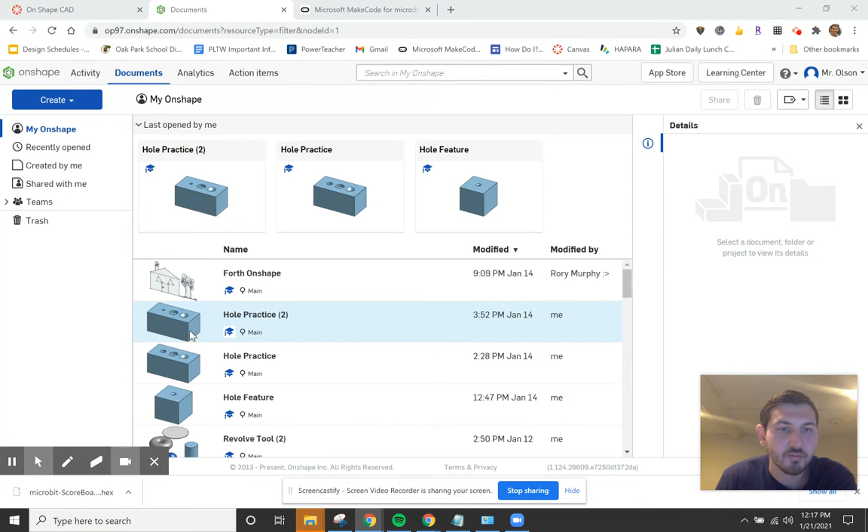This video is going to show you how to create a working drawing using the OnShape CAD program. Just to demonstrate it, I'm going to open up a basic object for you. That way you're able to just see how to import the object, add dimensions, and then also shade in some stuff. So I'm going to open up our hole practice, the one I went over when we were creating holes. And so I'm going to open that up.

Okay, so here's the object. You can choose any object that you're going to end up making. So whatever it is that you choose to do, just make sure that you are choosing the one that you want to make a drawing of. Got hide tools here. Okay, so when I'm done and I'm ready to make my drawing, my working drawing.

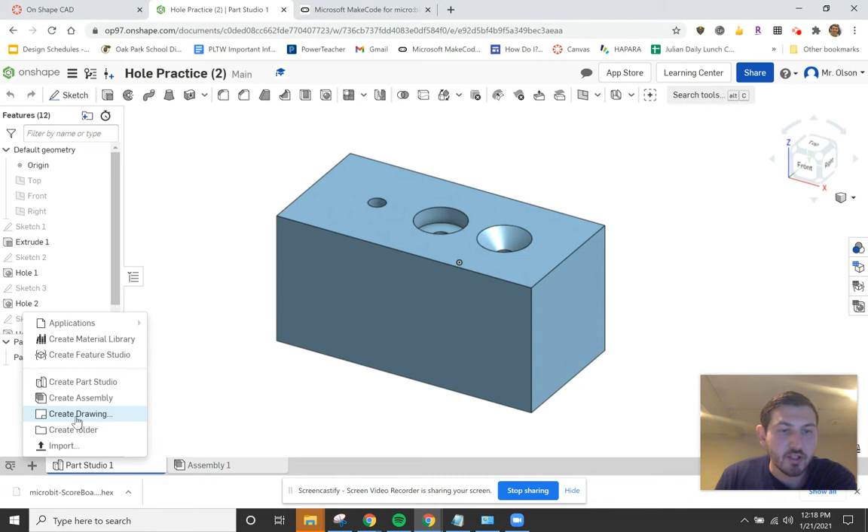Down here at the bottom, it says Insert New Element. So I'm going to click on Insert New Element. And then I'm going to create a drawing, and that's located right here. Once you are in here, I'm not sure you're going to have any recently opened ones. So if you go to OnShape, I'm just going to use the first one.

This is in inches. Okay, so if you are doing the bracket or something that is done in millimeters, you're going to want to choose the other template because then it's going to give you millimeters instead of inches. But since I used inches to create this one, I'm going to go ahead and use the drawing that uses inches as well. So I'll go ahead and hit OK.

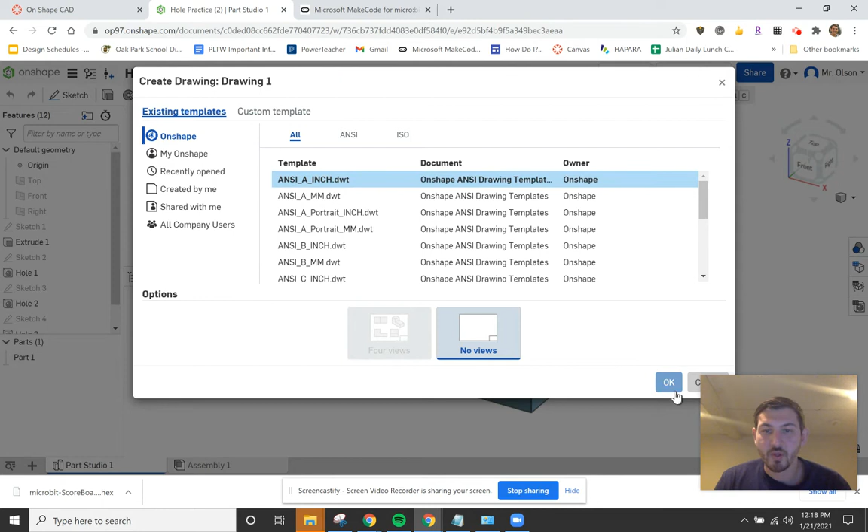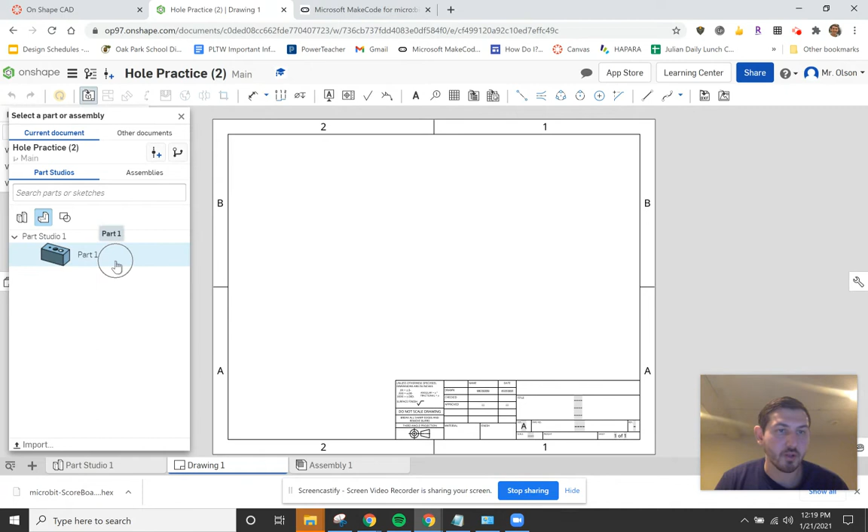All right, so because I had my part open, you can see that my part is ready to be imported right here. If you have multiple parts in one file, you should be able to see the parts in here as well, which is great because then you can just put them all in the same drawing if you have to. But because we're dealing with one part, I only have one part here.

So I'm going to click on my one part, part one, and I'm going to go ahead and insert my front view. The front view usually goes in the bottom left corner here. So I'm going to click. Okay, so that's my front view. If I move my mouse over to the right, this is going to be my side view. So I'll click again. Now I have my front and my side view.

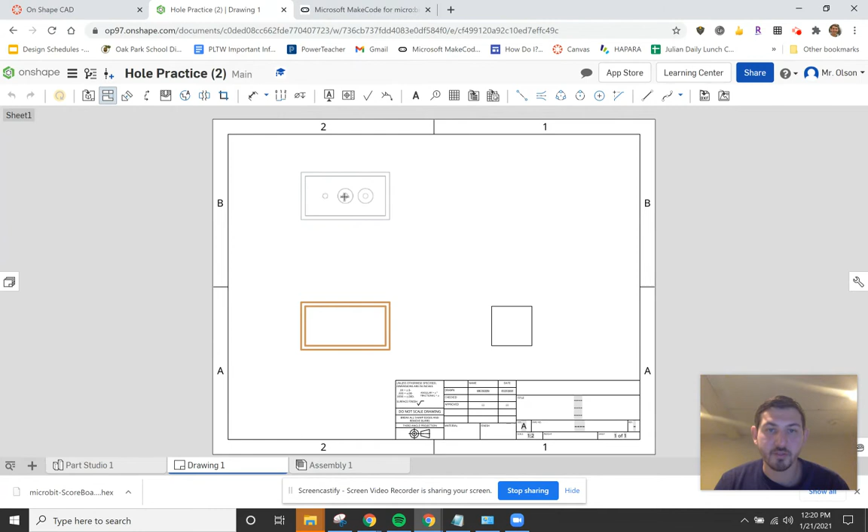Now I have to click here to select that object again. And now when I move my mouse up, I can do my top view. Now notice I'm starting to get some details because that's the first view. I'm going to click where I actually have some information. Okay, I'm going to click on my front view again.

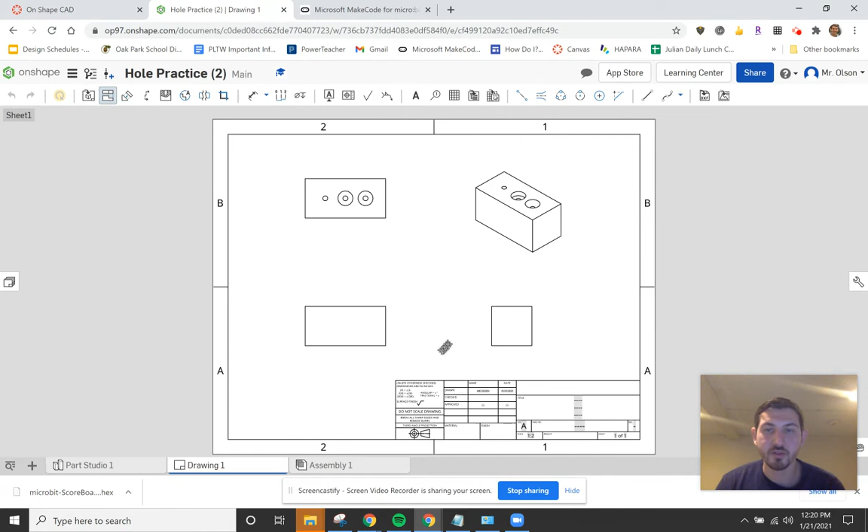And then I'm going to drag over to this corner piece, and this is where I'm going to place my isometric view. Remember, isometric means equal sides for my 3D view. I'm going to click, and that's going to place my object. So now I have all my views, which is great. Now I'm going to hit the escape button because I don't want to be placing any more views.

What I do want to see are some hidden views. So if I right-click this, I can view properties. And so from here, I have a bunch of different options. So view orientation, this is my front view. Okay, that's what I want.

If this is too small or too big, I can change that. So notice if I go like 1:1, my scale goes up. So that's like the actual size, 1:1. 1:2 gets smaller. If you want it bigger, you go the other way, so it's like 2:1, 3:1, and you can get it a lot bigger. So depending on how big your object is, you're going to want to change the size of that accordingly.

Tangent edges, we're going to do solid. So we're not going to be changing that. Best performance is fine. And front label. Okay, so that's all there.

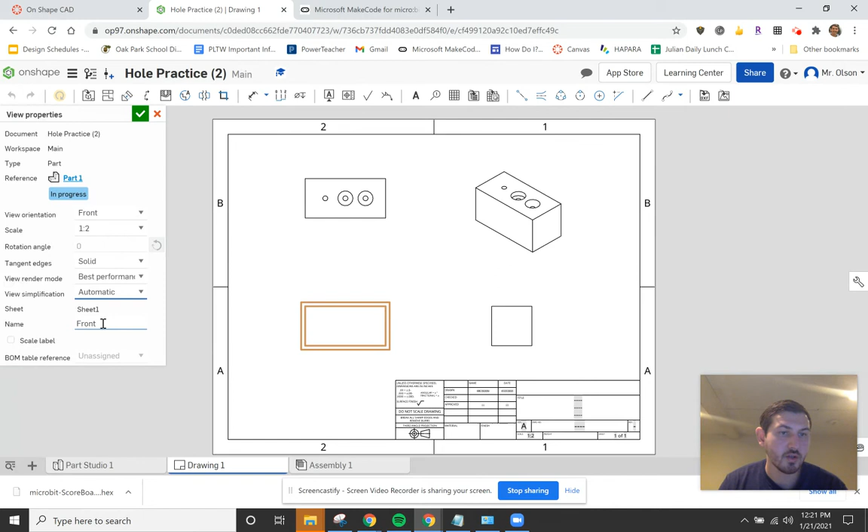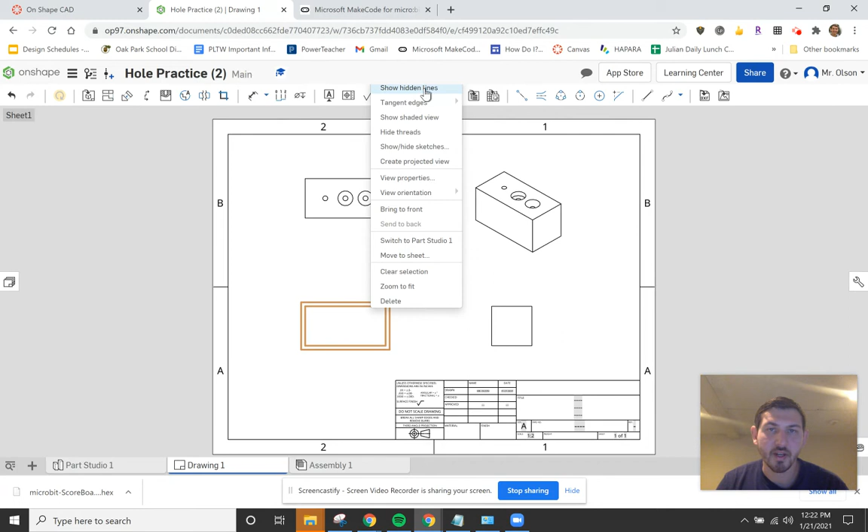Now to show my hidden lines, I right-clicked on my object, and I'm going to go ahead and click on hidden lines. Notice that now it shows my holes. I can also do that here. In this case, it's not going to make any sense because you're going to be overlapping. So I think it's almost better just to leave the hidden lines on this one. I could right-click and show hidden lines again on this as well.

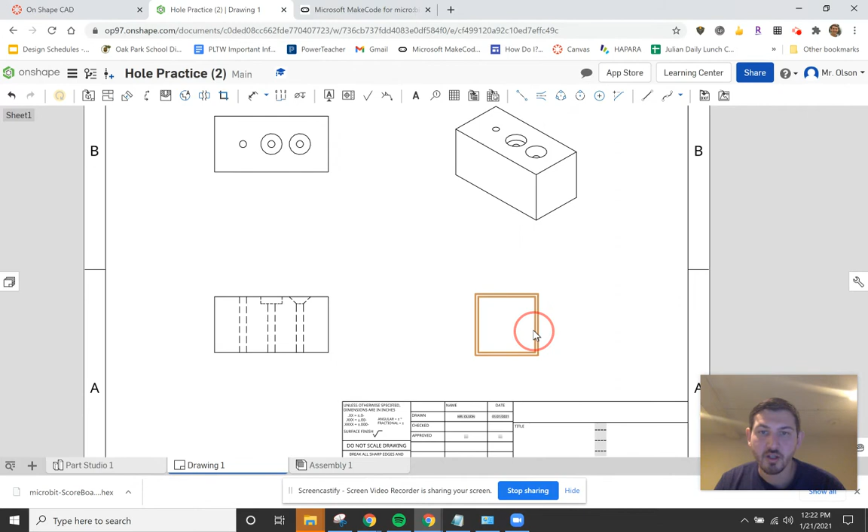I'm not going to do that. I don't know why it's going off my screen like that, that's kind of weird. Let me zoom out.

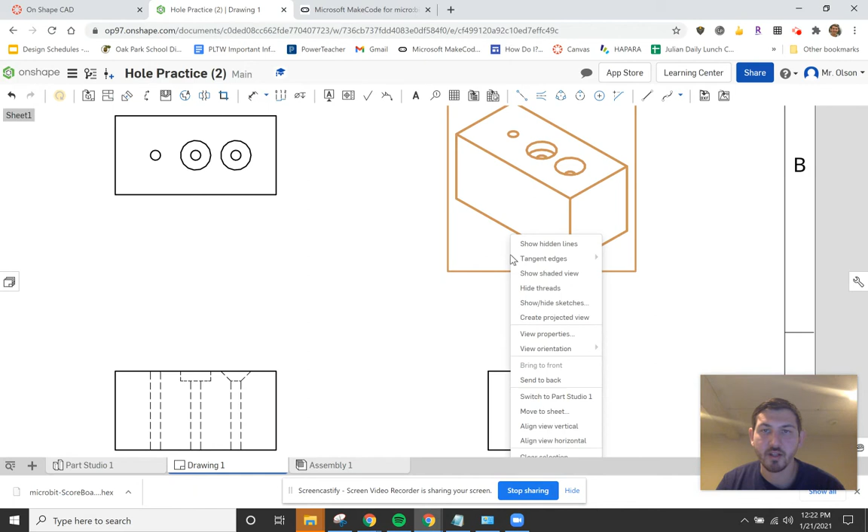So there's my hidden lines. This 3D view I want shaded, so if I right click on that, I can do show shaded view. That's what I want, shade it in because that's the most realistic view.

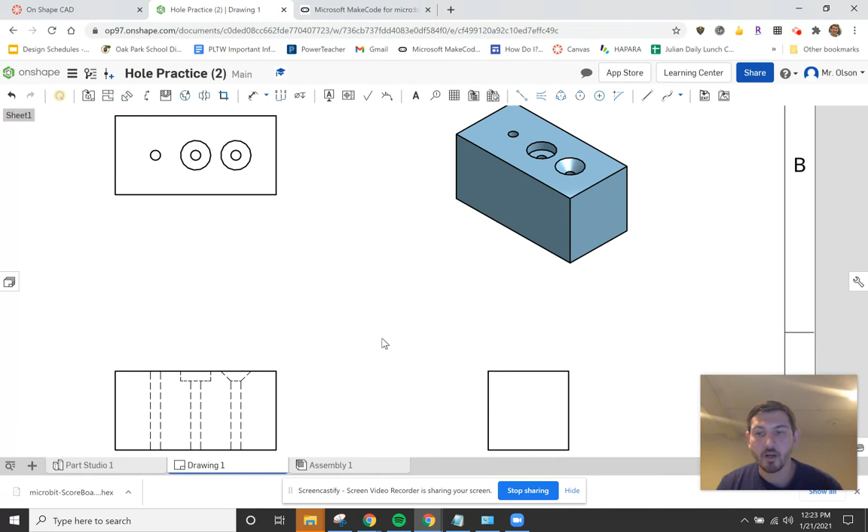And now I'm ready to put in my annotations. So my dimensions are right here. The thing you want to remember with dimensions is, first of all, you don't ever dimension the 3D view. Secondly, you want to dimension enough where someone could make this object if they got this blueprint or working drawing, but you don't want to over-dimension where you're relabeling things.

So what do I mean by that? Let's just start dimensioning. If I click here and say this line is this height, I wouldn't want to go and say this height is 2 also, because I already know that from this dimension right here. This is the height, this is the height.

Just like if I were to do the width here, let's go ahead and click, and I'm going to do the length of 4. This is also 4, the length is also up here, right? But I don't need to relabel that because I already have it down here. These lines all match up with each other.

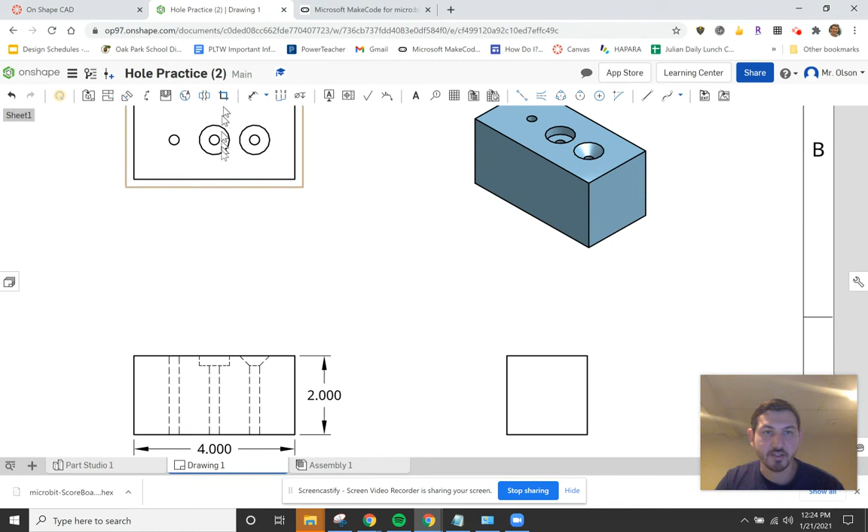So this line matches up with this line, these lines match up with the lines in the... Now the width, I don't have on this view, so I would have to click my dimension and label my width over here.

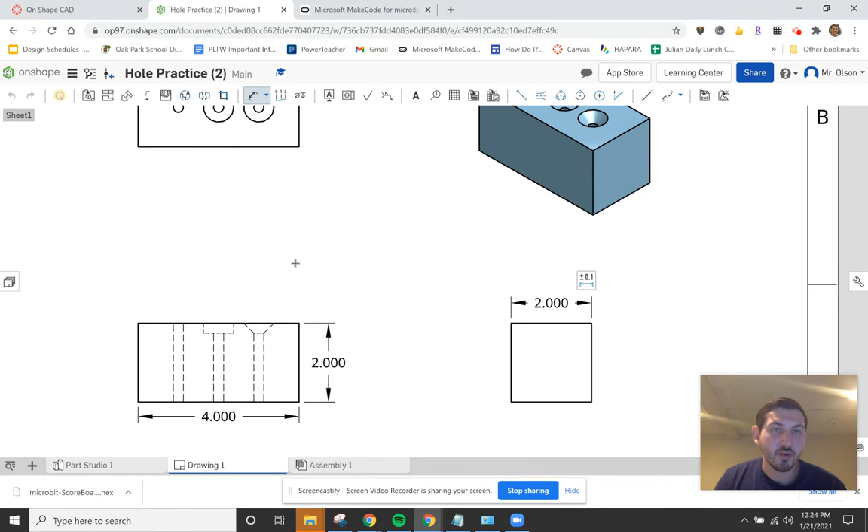You can then get specific with the holes. So you can say the depth right here is the diameter of my hole. This outer one is the diameter of the countersink part, so the outer one here, and that's the same thing over here. Here's my hole, here is my counterbore. And then if I click on this one, that's my hole.

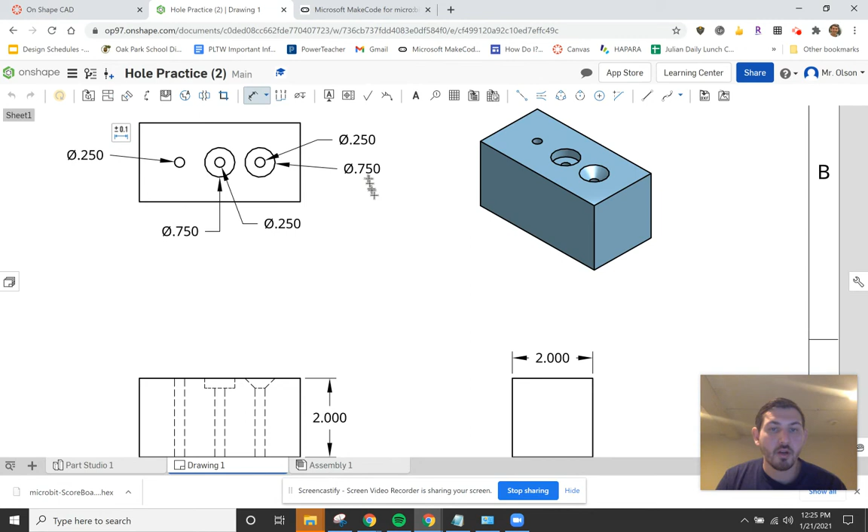Now they happen to be the same, but it is important that you mark those as well. With all that information, minus the fact that the countersink you have to have the angle at which it's at, you have all the information that you need in order to make this block, which is pretty neat just by those dimensions that I've included. So that is actually correctly done.

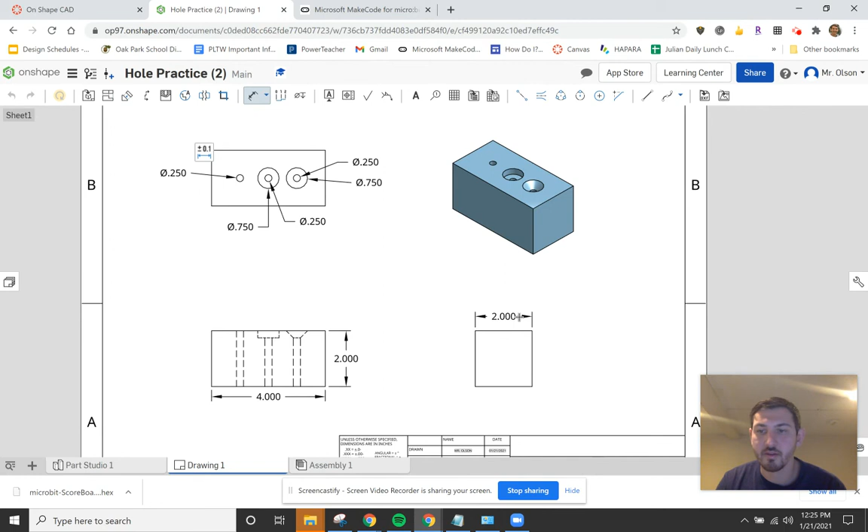Now, could I have dimensioned down here? Sure, you could have, but I just figured maybe all the holes are up here, it's easier to see. I have my height, length, and width on the bottom part. It just makes it kind of easier to follow along.

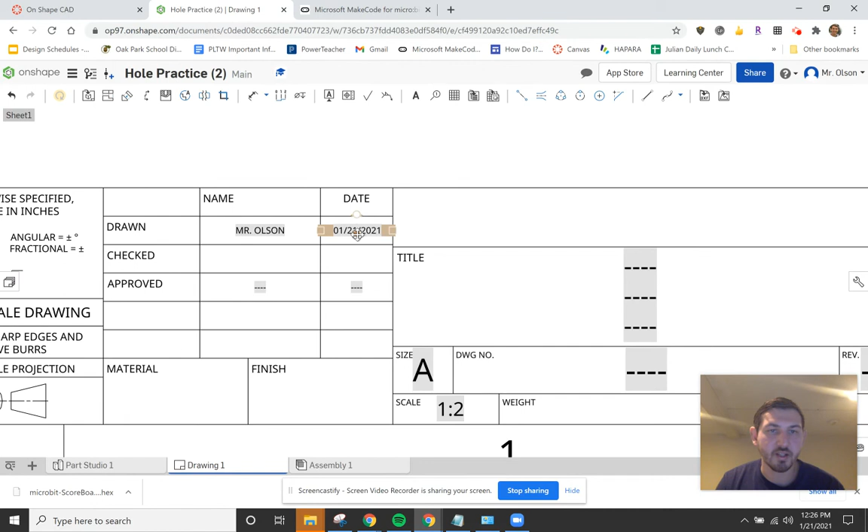Okay, the last piece we have to talk about, and I'm going to escape out of that tool, is our title block. Notice it pre-populates my name and the date that I've done it. We're not going to do checks and approvals, but what I would like to do is add a title in here. So I'm going to right-click these blank spaces.

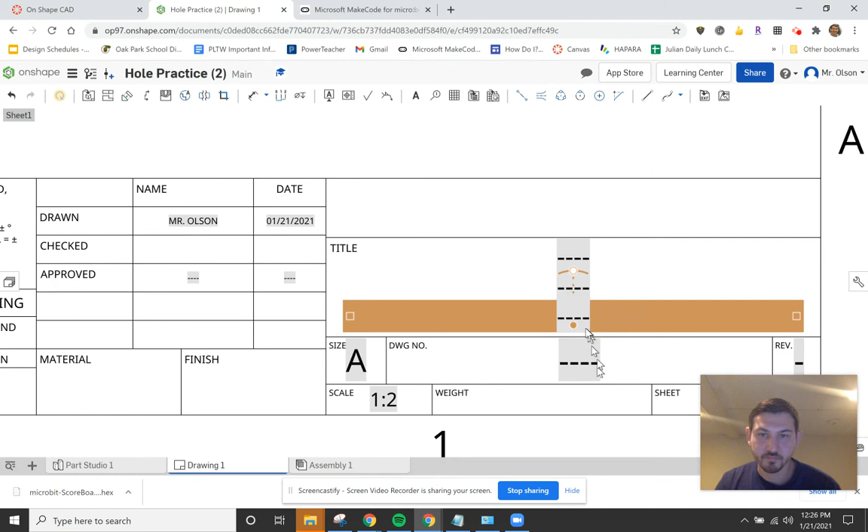I should undo that because I didn't mean to do the drawing one. I just want to delete these lines here, so I right-click and delete. And if I double-click this one, I can then type in here.

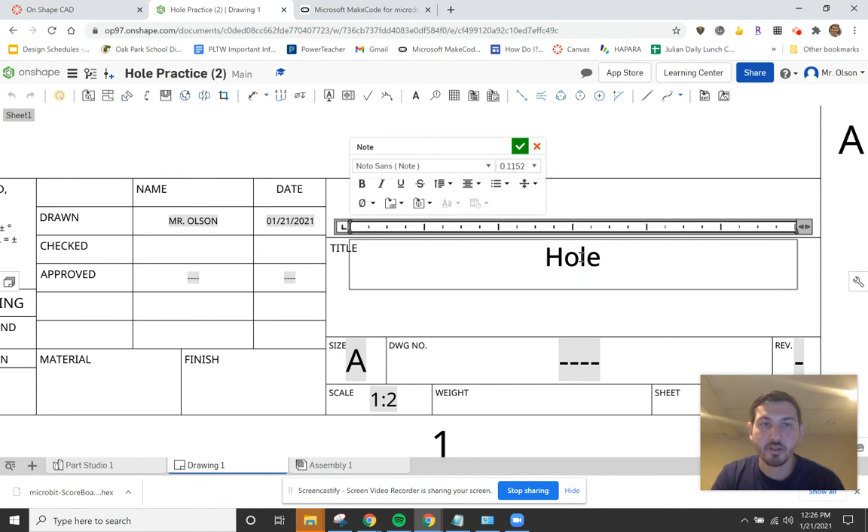So the title of this was just Hole Practice, so I can title that. You can change the size and the font. Hit OK, and that's really all you have to do down here.

It gives you the scale that you used for your drawing, which is great, right? So you don't even have to put that in, it populated that for you. And that's really it.

Now, if there were other views that might be important to your drawing or other pieces, you can always put those in too. A majority of what we're going to be doing is single objects where you would do a front, top, and side view. That's your working drawing, so just being able to do this, this is what you're going to be submitting.

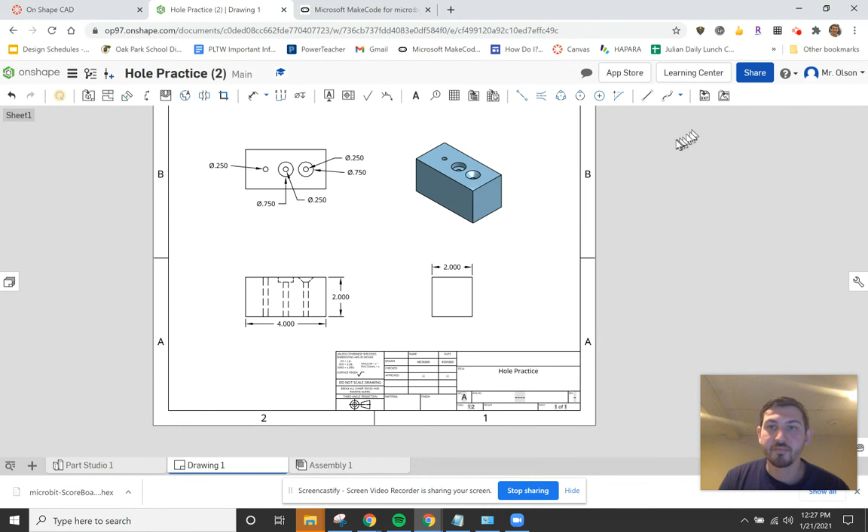So to submit this, you're going to have to actually make this into a PDF. So what I do is I go to these lines here and say print. I'm going to put this in like a PDF editor. I'm not sure if you guys have Adobe or not, but it should be something like this.

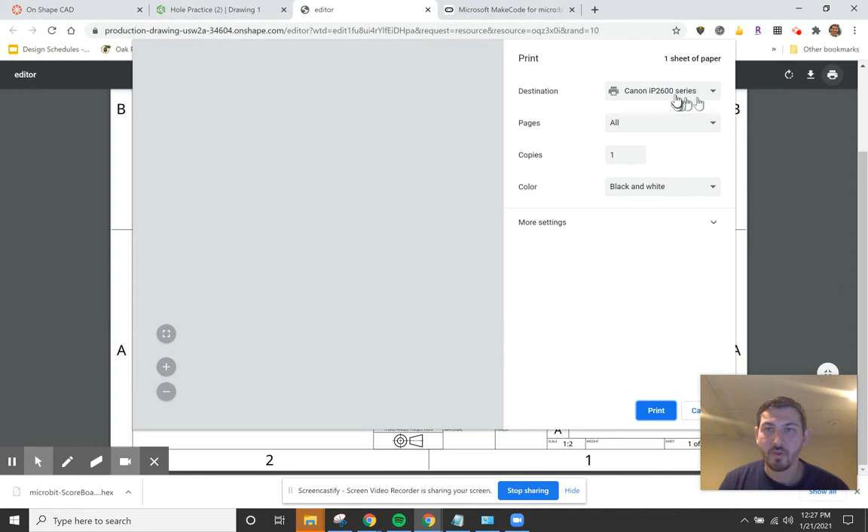And so then when you end up printing it, where the destination is, you can change that to save as a PDF. Once you save this as a PDF, it's going to ask you where to save it, I think on your Chromebook.

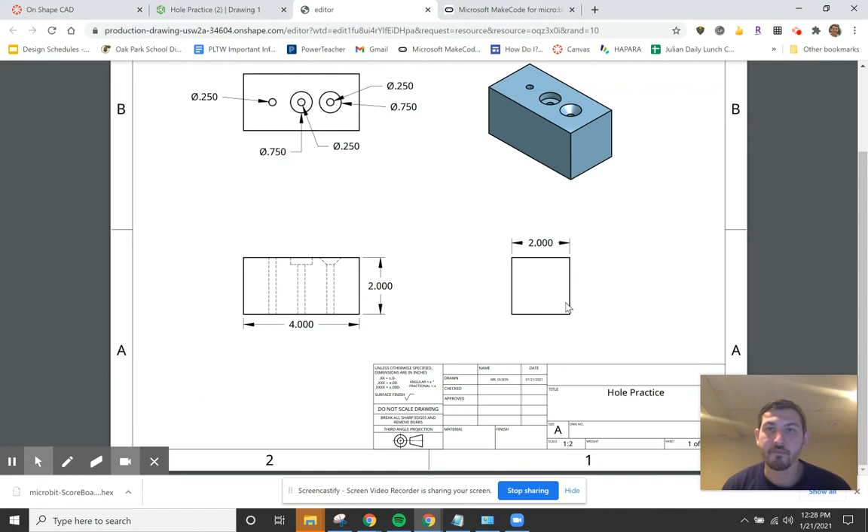I can save that, and now when I'm going to submit it, I'm going to turn in that PDF that I saved. Mine happened to be on my desktop. Yours is going to save probably to your downloads or your files. And that is creating a working drawing.